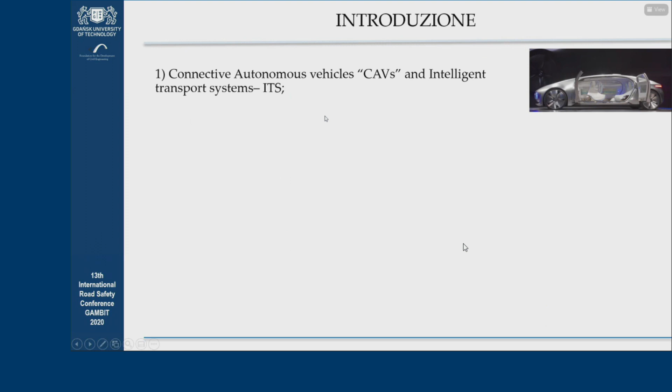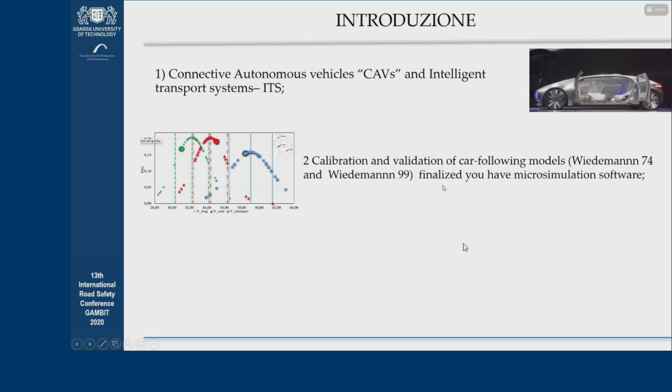So the way the study is structured is in three different parts. The first part considers the study of the CAVs, which is the connected autonomous vehicles, and the intelligent transport systems called ITS. The second part is the calibration and the validation of the models we have used to conduct this study. Specifically, Wiedemann 74 and Wiedemann 99. The software we have used is VISSIM.

And the third part of the study is about the data analysis through a software called SPF, Safety Performance Function, and we will see this later on. Let's go ahead.

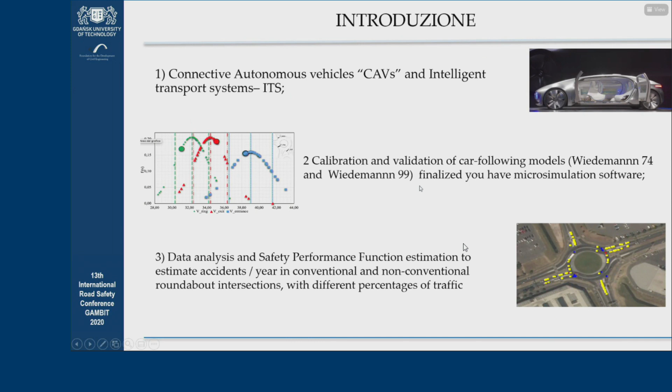So we can see that the European Commission has published some data on traffic and road accidents in Europe in the magazine Road Safety in the European Union, Trends and Statistics and Main Challenges in April 2018. Shortly, we can see that the trend describing the number of accidents in the last 15 years is decreasing, which is a good thing. However, we think that we can reduce this number of accidents further.

To do so, we have to focus on three different classes of technologies. We have to intervene on the accidents caused by vehicles against vehicles, so V2V, the accidents between vehicles and infrastructure, so V2I, and finally the accidents related to vehicles against X, which means vehicles against pedestrians, bicycles, light mobility, and so on.

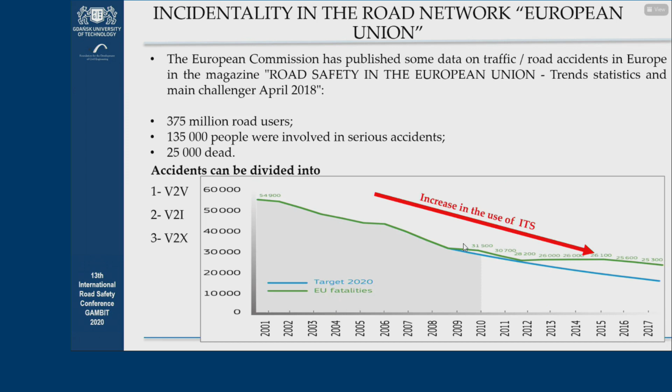This slide shows the 5 different levels to describe an autonomous vehicle. The level we want to consider in this study is the last level, level 5, which is called in reality level 4B. It means that a CAV, so an autonomous vehicle, is characterized by being connected with a network, cooperating with other similar vehicles, so there is an interaction with other vehicles. And finally, there is no physical driver, so the vehicle is indeed automatic. There is no human being driving the vehicle.

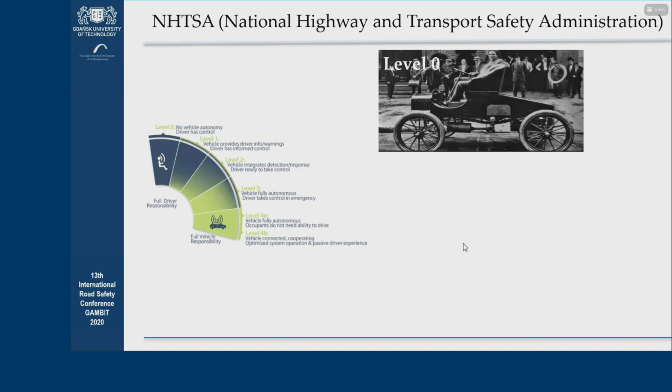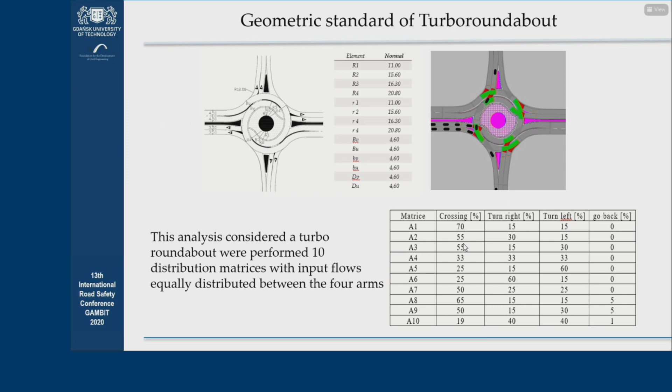And we have a nice slide here with some photos. So as you can see, it's quite modern as a technology. In this slide, we can see the typical geometry we have considered in this study, speaking of roundabouts. Also, there is an example of an origin-destination matrix, which you can see here.

And again, we have used two behavioral models. The model Wiedemann 74 has been used to describe the behavior of classical or traditional cars, whereas the model Wiedemann 99 has been used to describe the behavior of autonomous vehicles, which we have called CAVs.

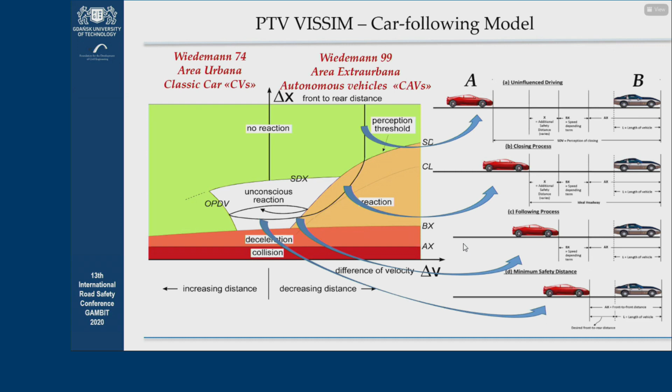This chart is actually a description of the behavior of these vehicles in general, and we can see that depending on the difference of velocity, we have different safety distances in case we want to brake, for example, or we want to stay in queue in line with another car. Right, let's go ahead. Hang on. So the software we have used to analyze these behavioral models is VISSIM.

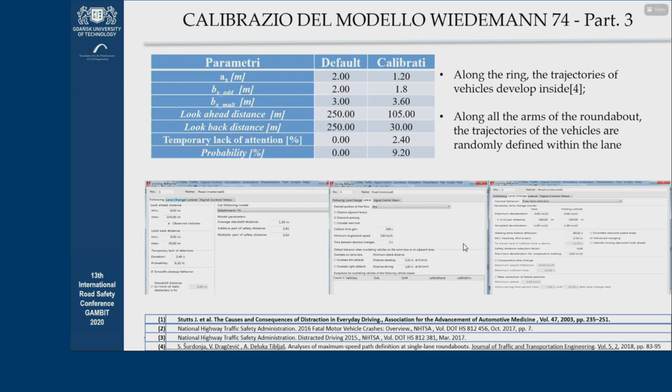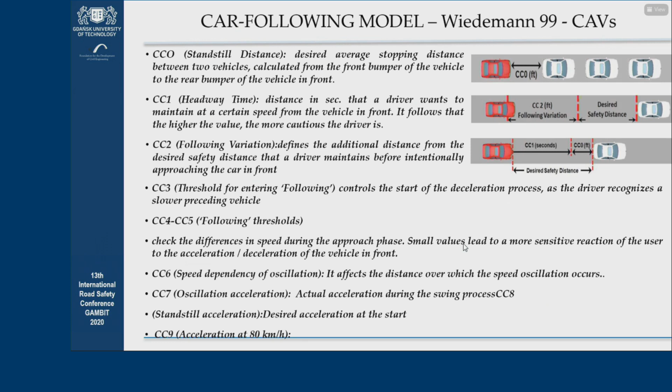They're described here. I think it's probably quicker to go ahead, but each parameter has been described. So we have standstill distance, headway time, following variation, threshold for entering, following thresholds, speed dependency of oscillation, acceleration, standstill acceleration, and acceleration at 80 kilometers an hour. Again, we have another description of these parameters.

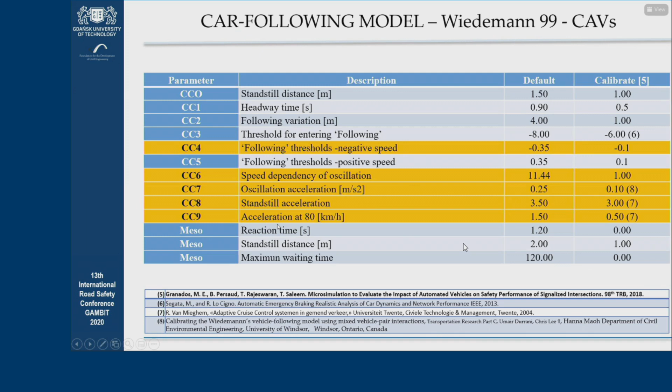The main difference here is we have highlighted in yellow all the parameters we can find in the existing literature, whereas the ones that have not been highlighted in yellow have actually been set up by us. And again, we have a default value and a calibrated value. Below, you can find the literature that we have used to get these highlighted parameters. And again, we have another table with a further description of these parameters used in Wiedemann 99.

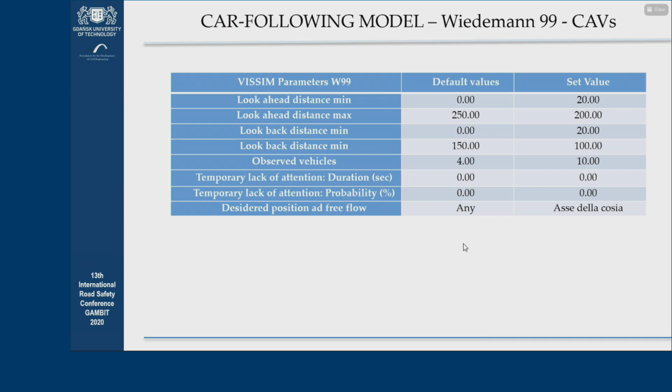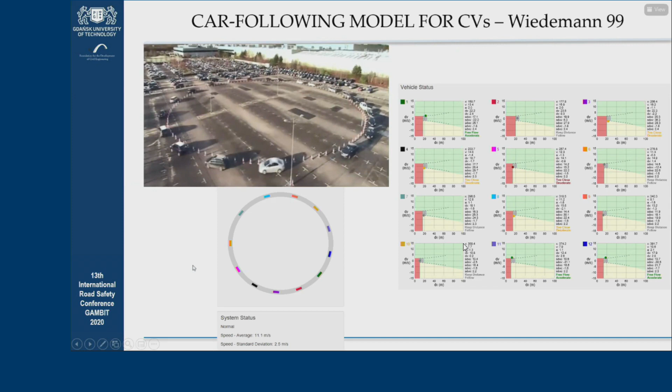So these cars are driven by humans, and the distance will be different. As you see, there's a lag, there's a delay. It's not uniform, I would say. Whereas if we analyze the automatic vehicles, we see that their motion is uniform. So the distance between vehicles doesn't vary. And let's go ahead.

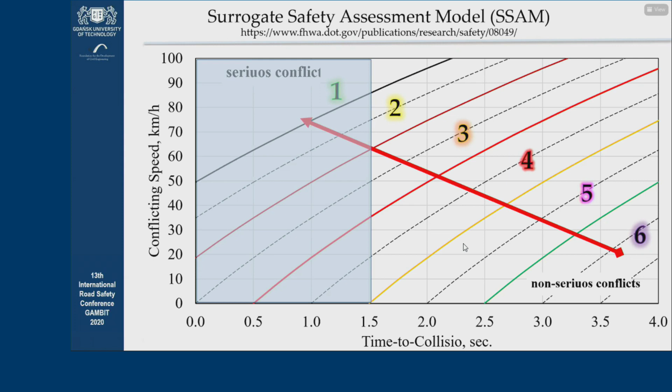This means that... 2 minutes left.

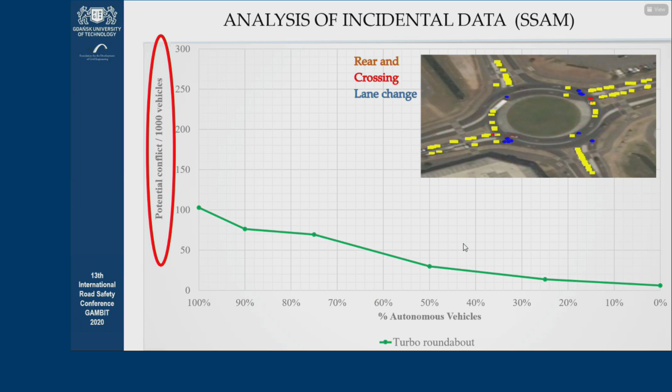Yes, I'm done, really. And again, if we want to reduce even further this number of potential conflicts, we think we can intervene by changing the road geometry and also the way information is exchanged between the geometry and the vehicles when they drive, automatic vehicles, we're speaking. And that's pretty much everything.

I read the conclusion. The discussion explained within this article has shown several times how road intersections must be considered as crucial parts of the road network. Therefore, they represent the critical areas where vehicle trajectory conflicts can take place. Hence, poorly designed intersections can easily lead to congestion phenomena with the consequent formation of vehicle queues, and in several cases, even to serious or very serious accidents.

Therefore, the right choice of intersection layouts, such as turbo roundabouts, becomes fundamental to offer a better level of service to users, giving them the opportunity to travel in the shortest time possible on the routes they have chosen. The method of this article concerns the use of simulations of the road environment through the application of VISSIM software, and then the simulation of potential traffic conflicts through the application of SSAM software, which respectively reproduce the behavior of the vehicles inside a turbo roundabout.